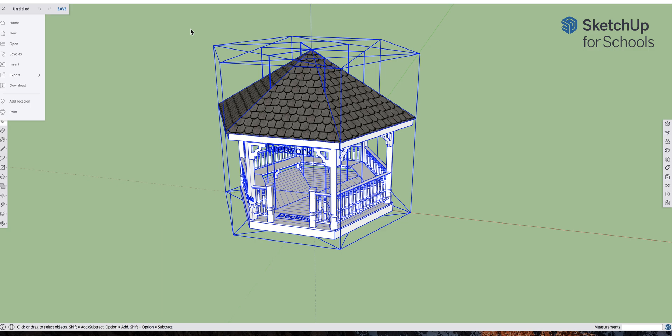Scenes in SketchUp. The first thing I ask people to do is go in and select their entire gazebo, then copy it with Command-C, or Control-C on a Chromebook. Copy it and then go open a new file, and once the new file is open, do paste in place.

Paste in place, and the gazebo would come into the new file. The first thing I'm going to do is turn off the axes so it looks better, so I'll go to the tools on the right, click on the glasses, and turn off the axes and grid lines.

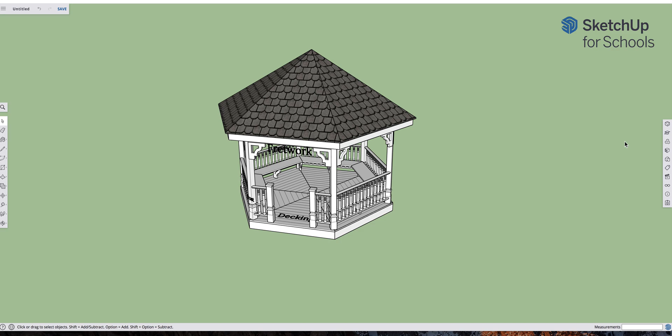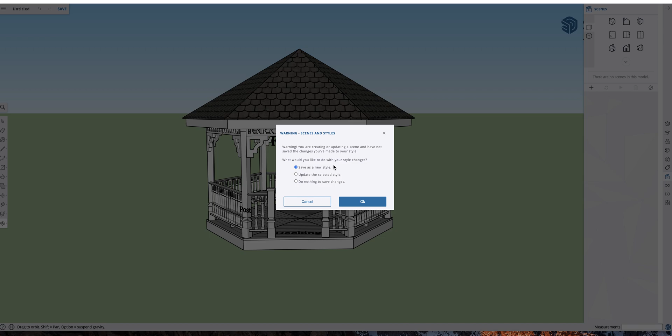Then I'm going to open up Scenes, a little clipboard icon in the tools on the right. You can set up a view, whatever view we want, and just hit the little plus button to add a scene. If it asks to create a new style, save as a new style and click OK. That just means the new style being saved has no grid lines or axes lines showing.

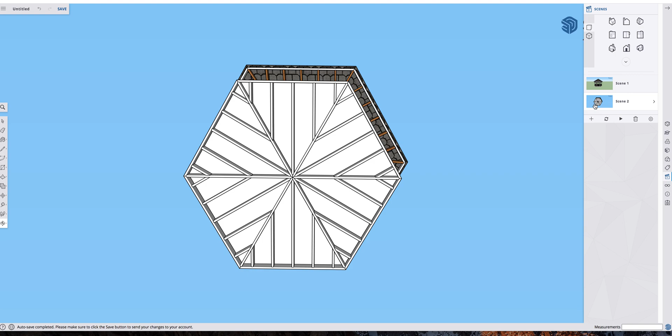Then you create different views and different scenes. So ones I want people to show are the underside, so you can see the floor framing. All I have to do now is go over on the right and hit plus, and that adds that scene. Maybe zoom in so I can see everything fits well, then add that as a scene.

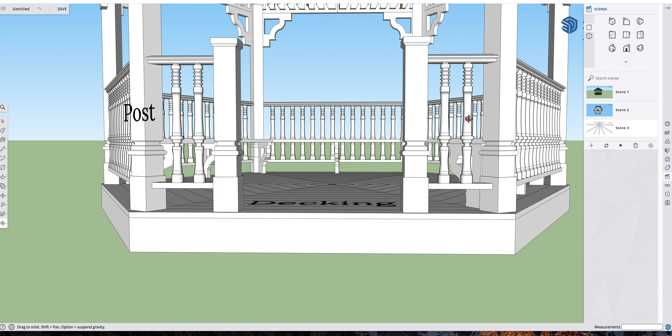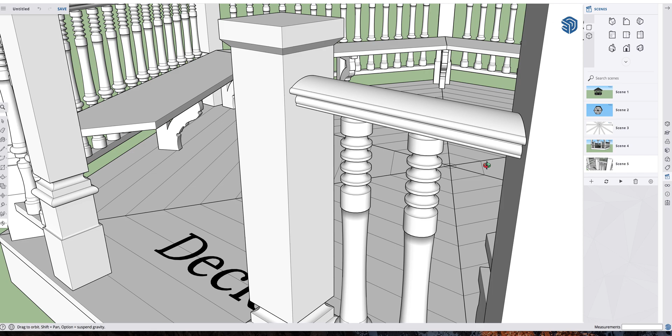The idea is basically to go through the gazebo and show all the distinct parts of it. Here's the posts and the balusters - that's a scene. You could even zoom in to show the profile of the handrail, and add that as a scene.

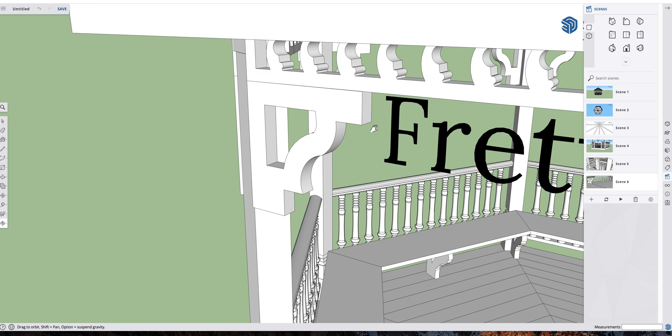So you'd show off all the parts of the gazebo - here's a bench, the support. Show the fretwork, which is the cutouts up there, and the corbel, or bracket here. Show all the distinct parts, so you can show the roof, and add that as a scene.

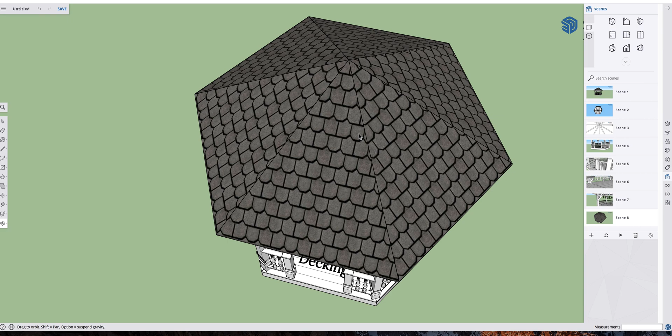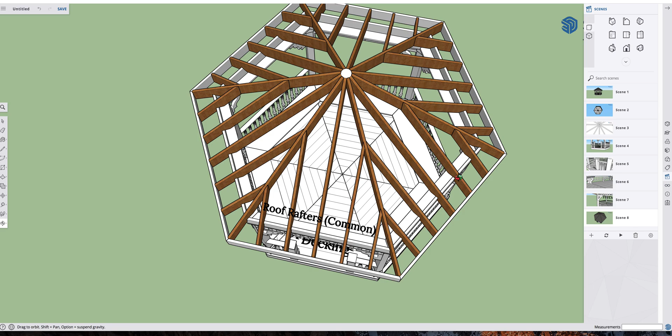Then I might go in and hide the roofs in the 5 separate components, hiding the roof in the unique component, and I could add that as a scene. Maybe zoom in on our little 12-sided block here - you can see that everything fits perfectly. Add that as a scene.

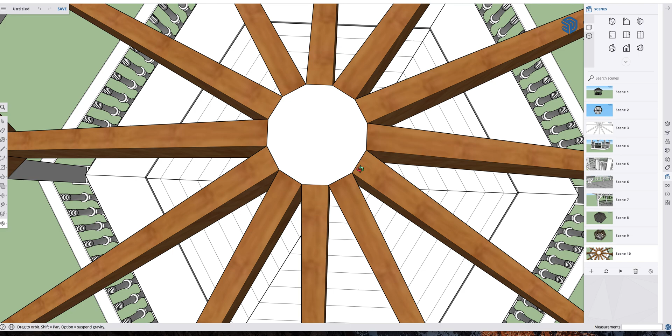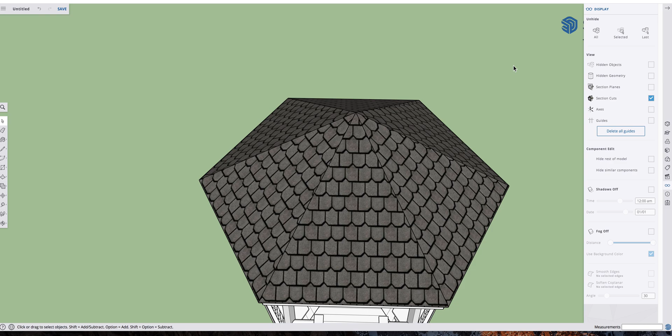Then maybe one final one with everything showing. Go back to the glasses, unhide all, get inside this component, and unhide all. Maybe even for dramatic effect we could add this as a scene. Maybe add this as a scene too. You could spin all around it.

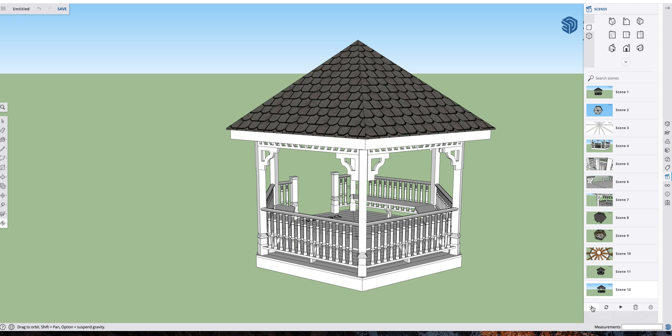It's hard to get an interior view here, but it would be nice to be able to look up and see the framing on the inside of the roof.

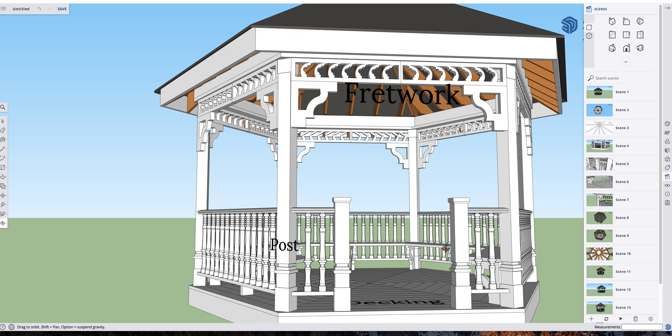Anyway, that's basically it. Once you create your scenes, you could, if you needed to, click on a scene like this one, and you could actually drag it and change the order. You can rename them, and at the very bottom of that scenes panel, you could hit play.

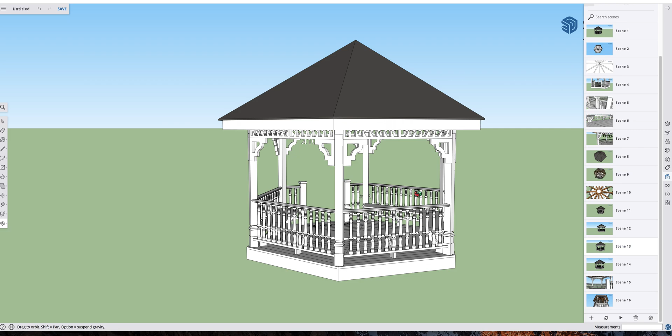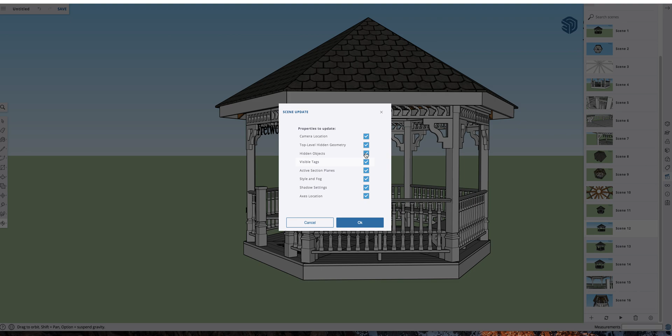If you did make a change to a scene, like you altered the view - if you were in a particular scene like this and wanted to change it, let's say I wanted to zoom in more. If I zoomed in, you can update that scene. Because I'm on this particular one, I can go down here and there are two arrows going in a circle - you can click on that and it will update everything, and that just changed that.

So then when you're done with the scenes, there's a play button. You can hit play and that will run the animation. And that's how you make scenes.